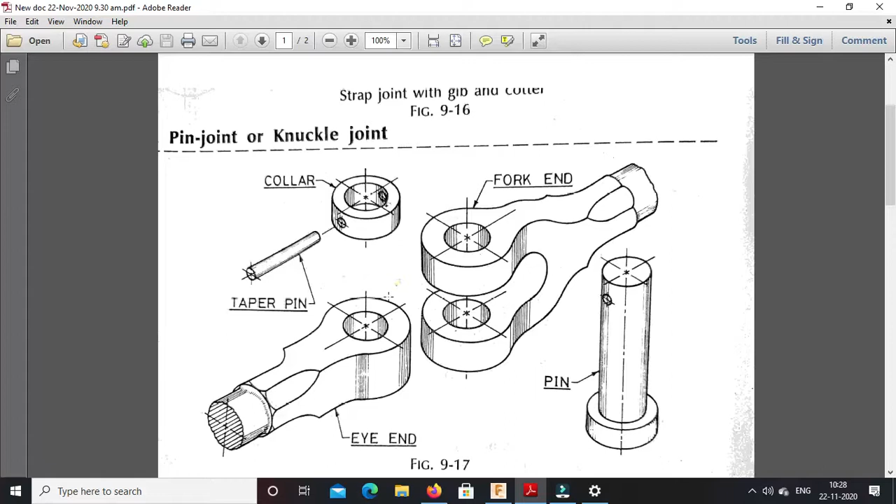In this video, we are going to assemble those parts to form the knuckle joint. This eye end will be connected to the fork end through the middle cavity, and the eye end will get fixed in between. Then through the common hole, the pin will be inserted from the bottom side. The collar will be placed on top of the pin, and the taper pin will be inserted through the common hole in the collar and pin for locking purpose. This is the knuckle joint.

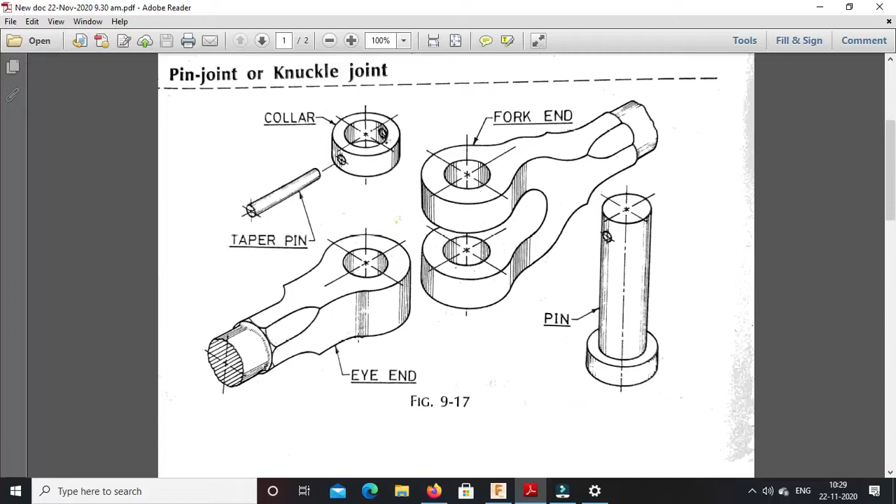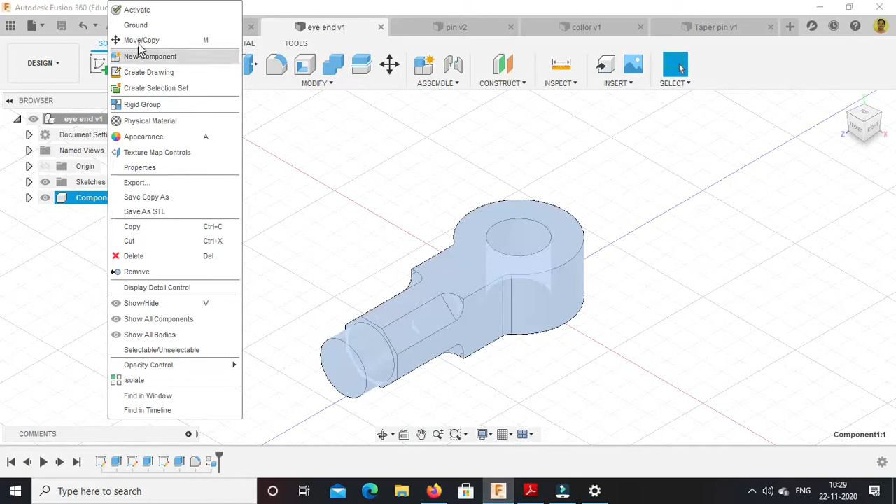We will start our assembly with the eye end. We have already created this part and saved it by converting into components. First step is to fix this initial component, so go to Component, Ground it. Now it will not be movable.

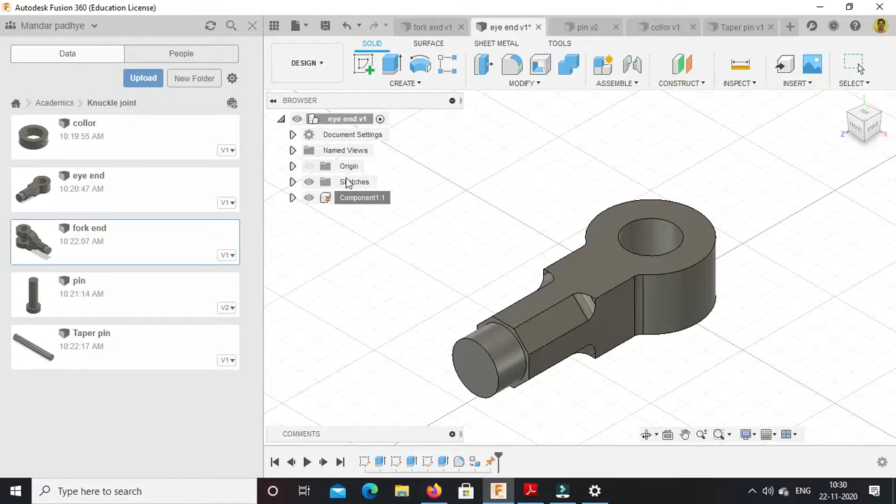Now we will insert another component, the fork end. Go to data panel, select this fork end, right click on it and insert into current design. It will take some time. We'll drag it outside for simplicity, press OK, close the data panel. Now I want to connect this fork end with the eye end, keeping this hole common.

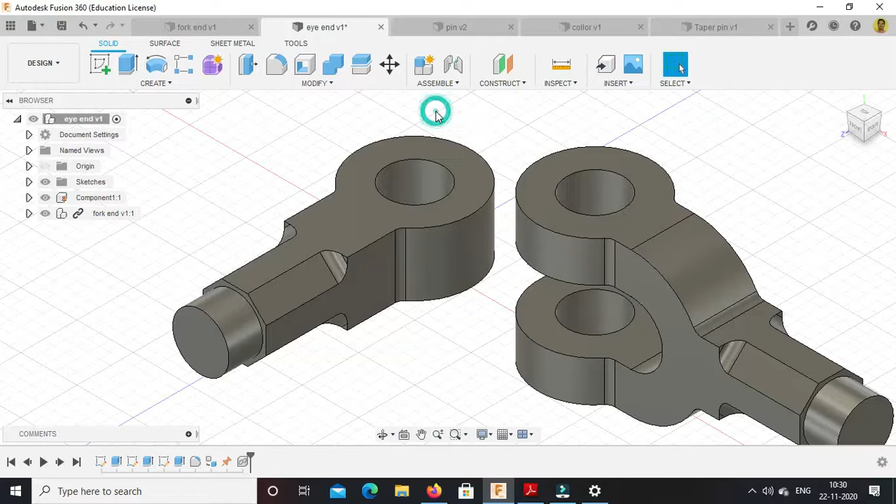For that purpose, I need to provide a joint between them. I will consider this as a reference part. Go to Assemble, Joint, press Ctrl for selecting the center. Then this upper face should be in contact with the lower face of the eye end.

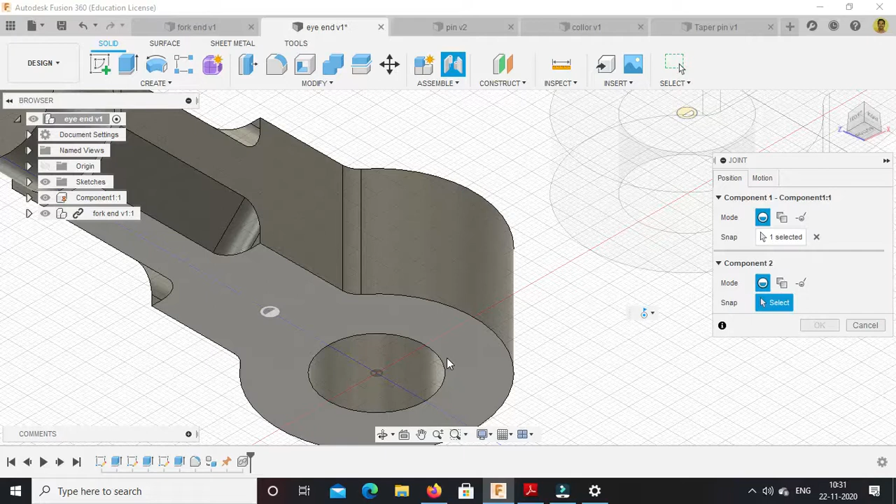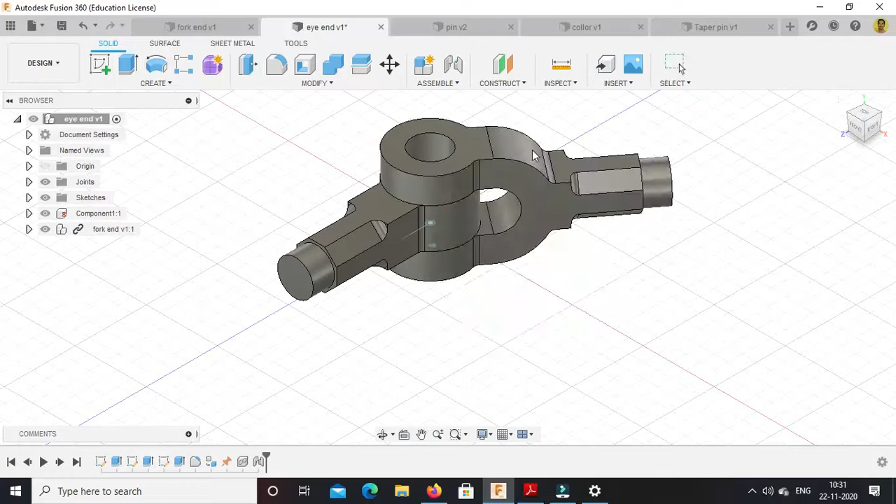Motion type should be revolute, along the z axis. We want it as the z axis, so we will keep it as is. Press OK. Now it is possible to rotate this component. We will keep it like this and capture this position for reference. It is still movable and will come back to its revert position.

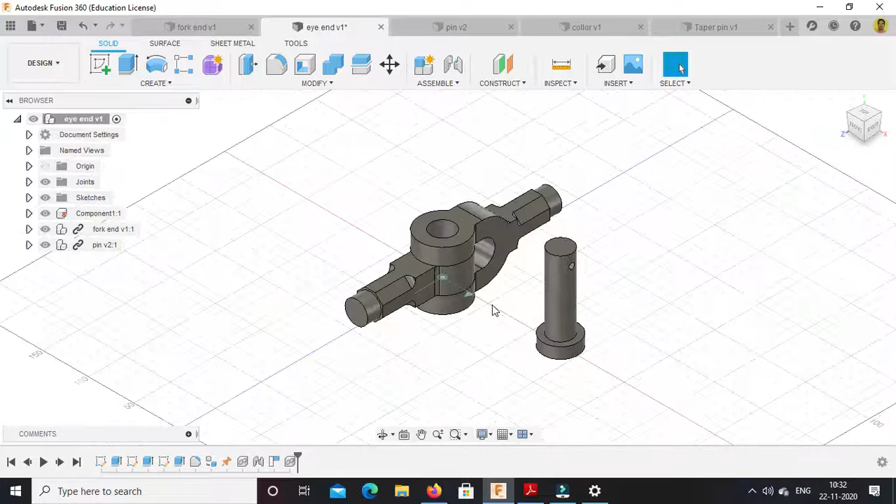Now we want to insert the pin inside this. Go to data panel, right click on the pin and insert into current design. We will drag it outside, press OK, close this data panel. In order to insert this pin, we will insert it from the bottom side. Go to joint command.

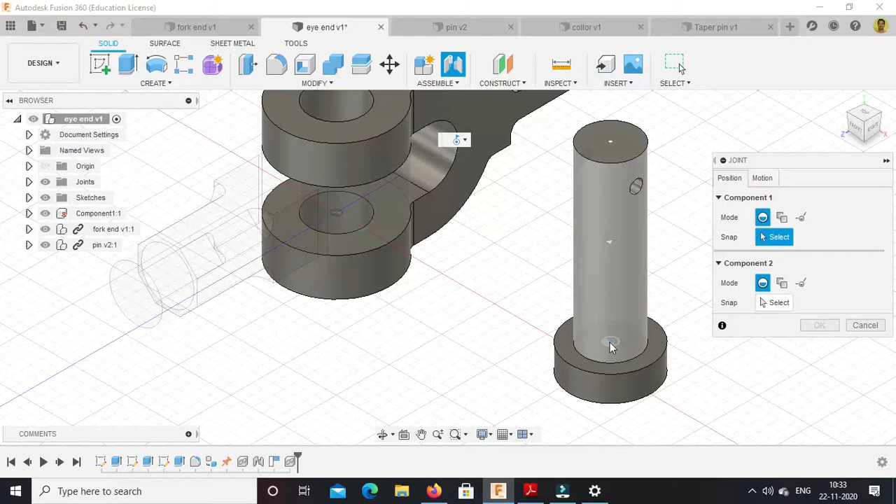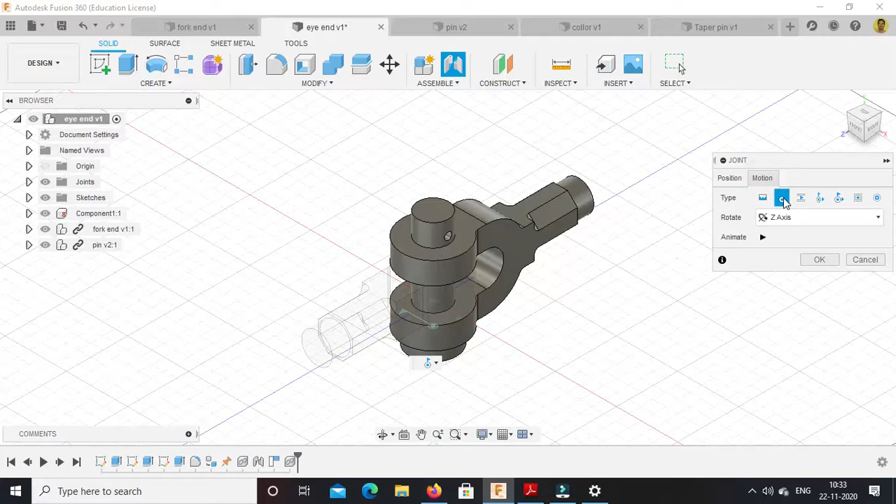It should again have relative motion. Select this face along with the center point fitted at the bottom. Then from the bottom side, select the bottom center along with the circular surface. That pin will get fitted inside. Press OK, because we want the motion to be revolute. Press OK, so now it can be rotated as per requirement.

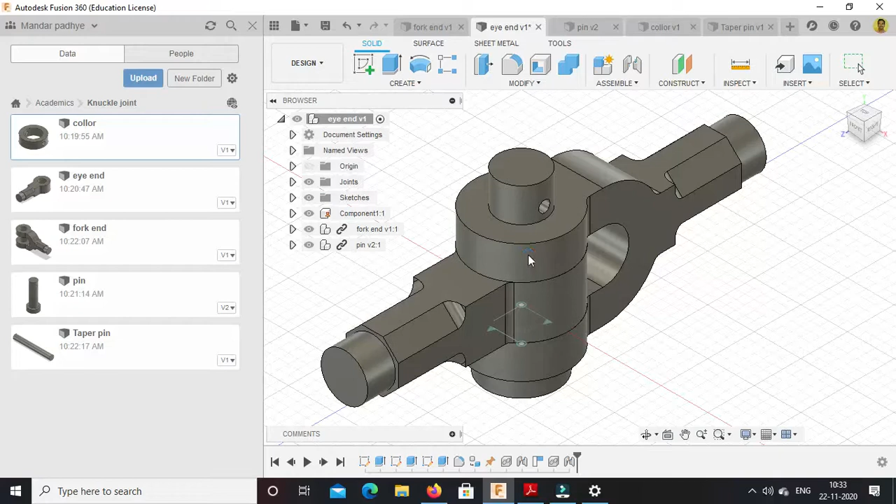We'll come back to original position using the revert option. Now we will place the next component, the collar. Go to data panel, select this collar, insert into current design. We will drag it outside, press OK, close this data panel. Now we want to insert this collar over the pin.

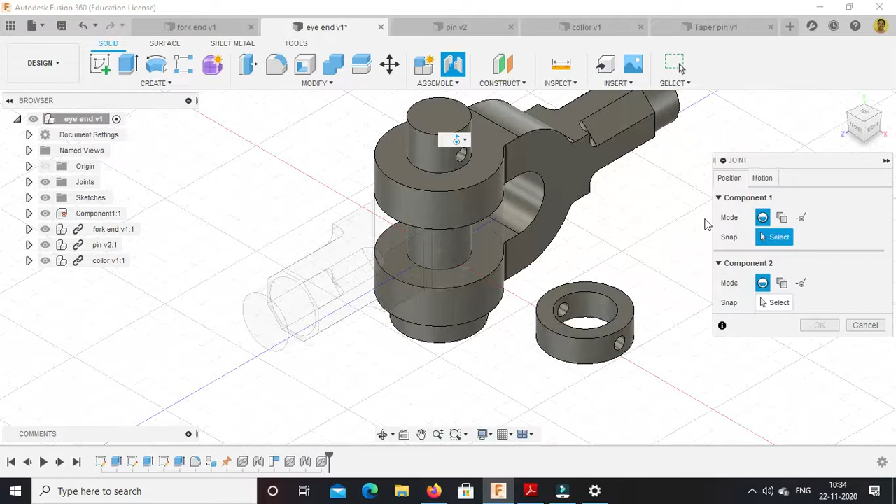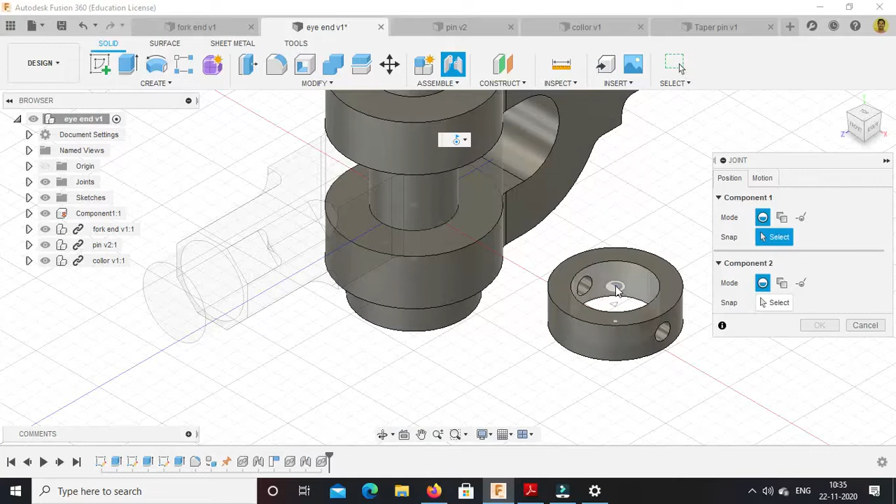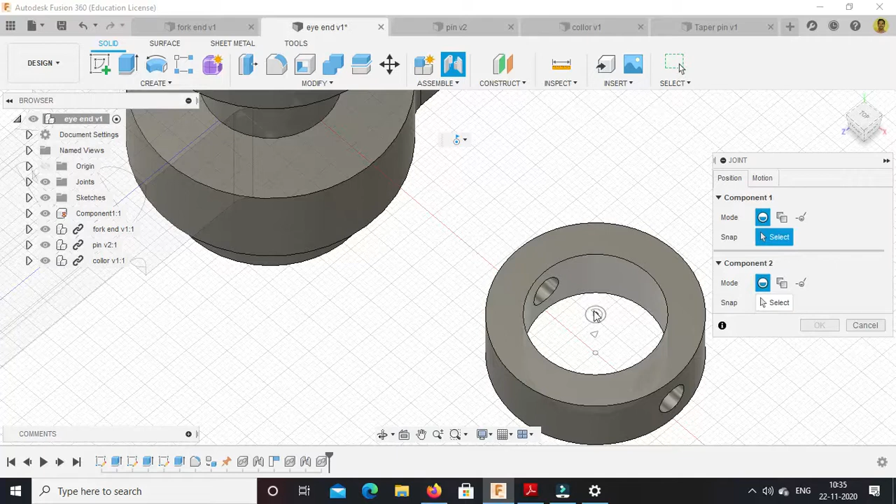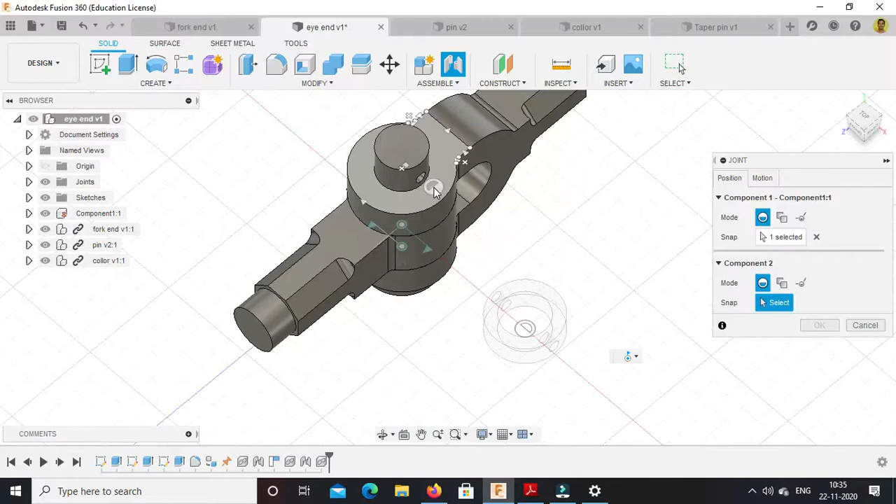For that purpose, go to Joint again. Select this inside surface, press Ctrl for selecting the center circle. Then we will select the same circle which is going to... no, we will not provide joint like this. We will try it in a different manner.

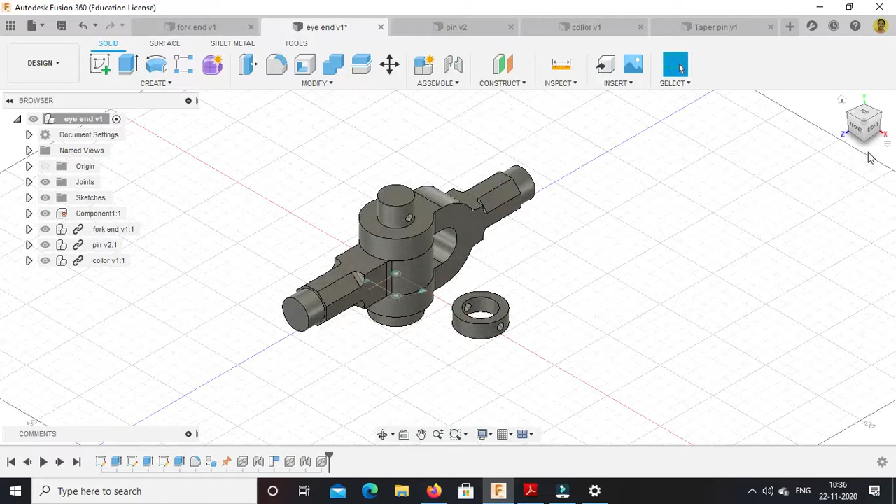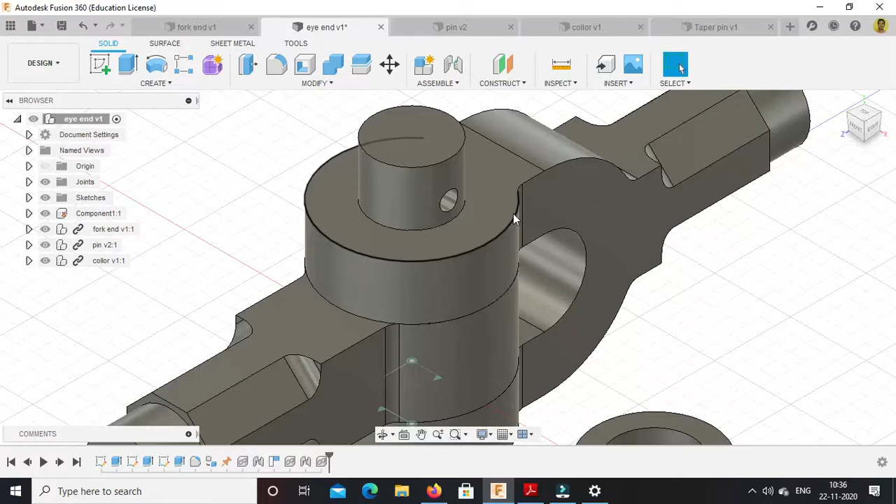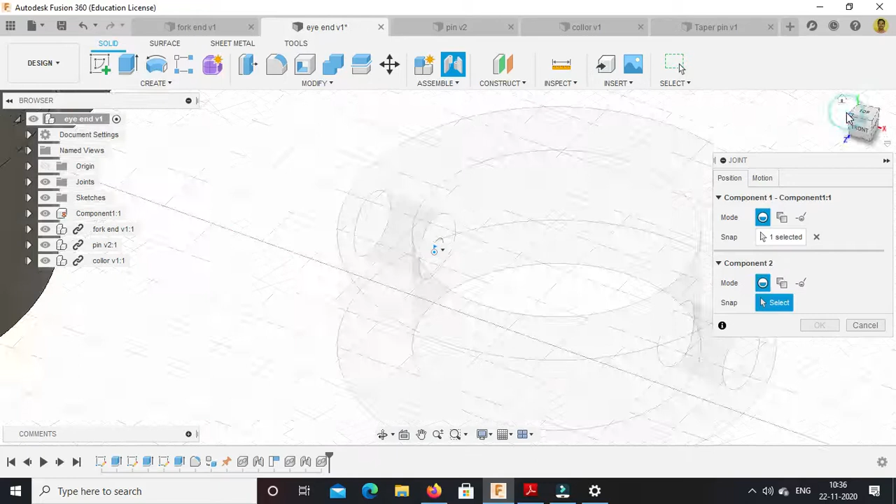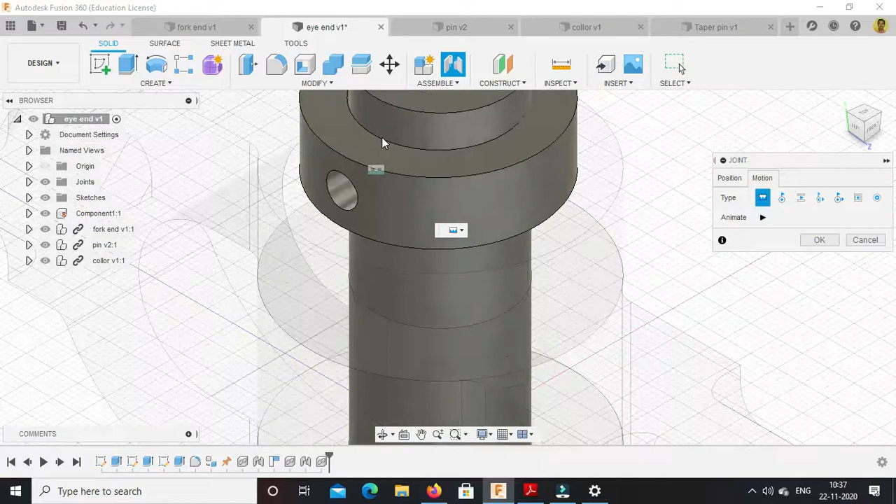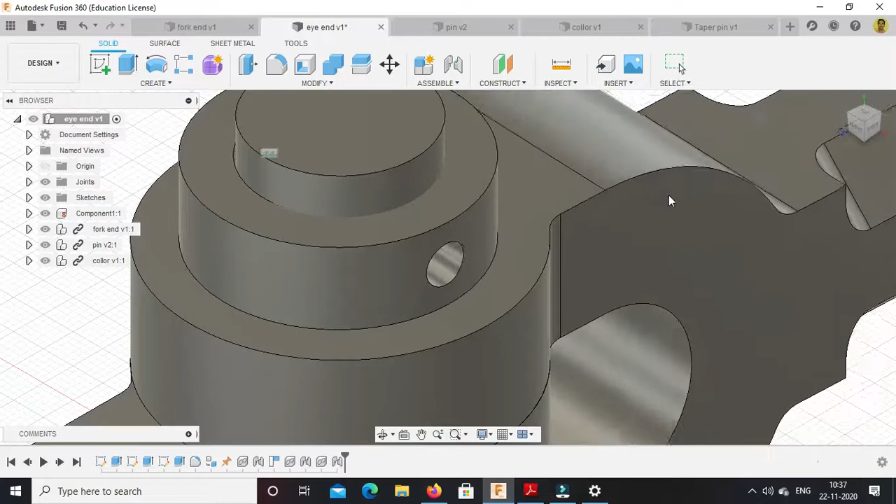Now we will be able to move it. Again go to default position. Now the final part remains - inserting the taper pin inside this hole. For that purpose, go to data panel, insert this taper pin into current design.

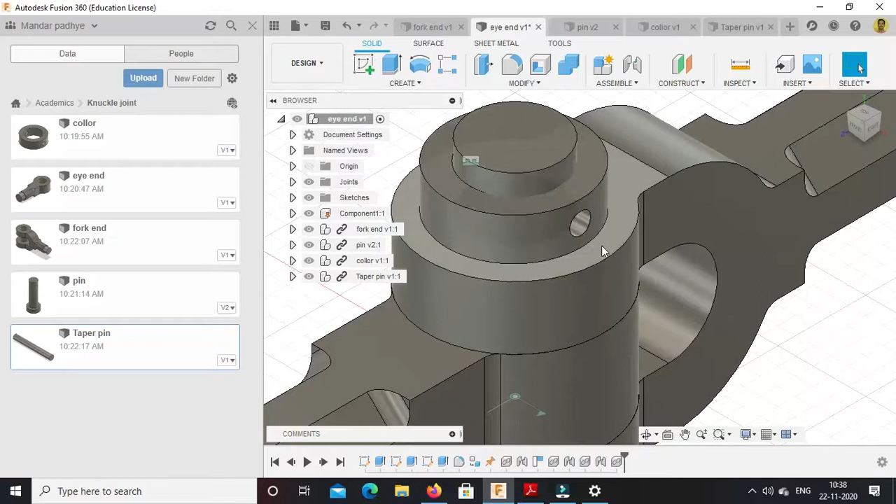While giving joint to the collar, either you can give the joint between the pin and collar, or provide a joint between this part and this part. There are various ways available. I have shown you joint by using this cavity hole, which I have to match.

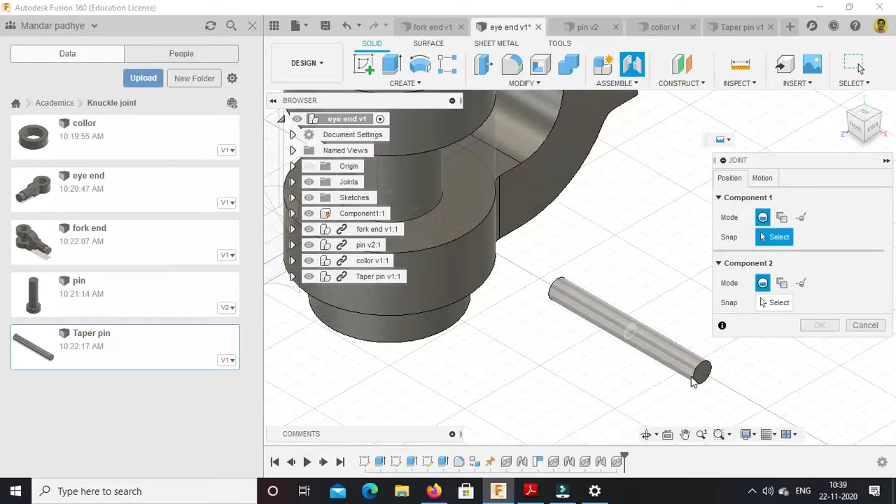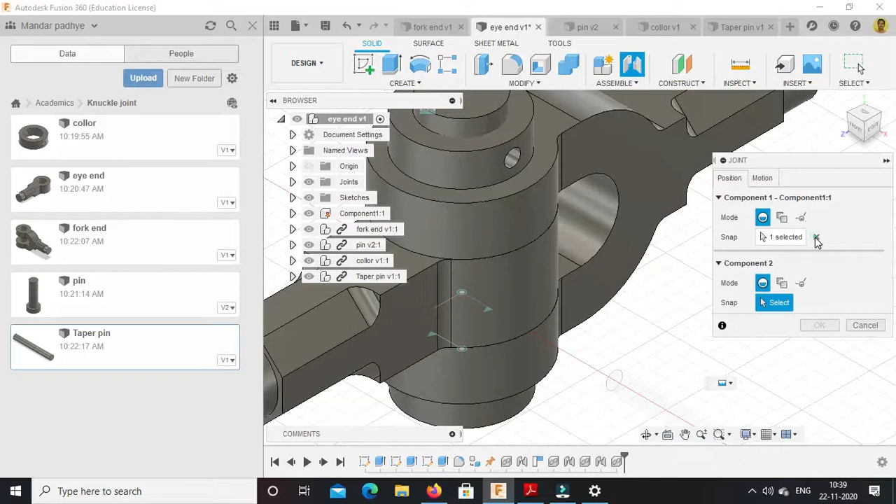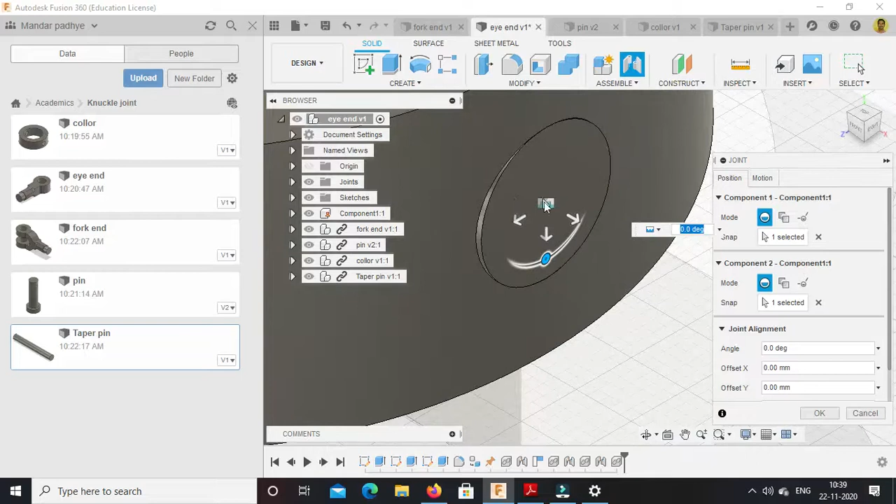Now I will connect this taper pin. For that purpose, go to joint again, select the face, then select the another face. I will select this again, then select the another face. While creating this joint, I selected the circular part along with the center, and the circular part of this hole along with the center, so they are exactly matched with each other.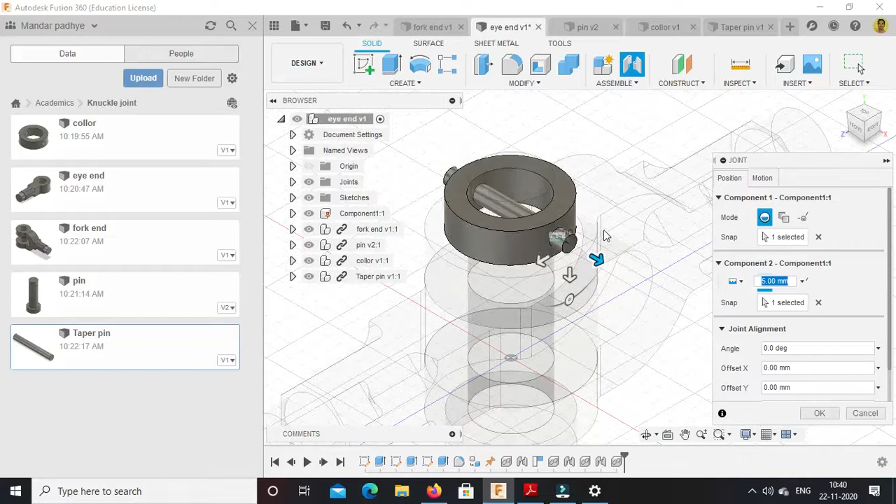I can provide an offset here by giving some distance. Let's suppose we have created 5 mm as extra, so we can keep the same distance of 5 mm - you can give the offset. I selected this surface with its center and this cavity of the hole with its center. Motion type - you can provide sliding also, so that pin can move outward, but for fixing purpose it should be tightly attached with the collar, so I am selecting the rigid option. Press OK.

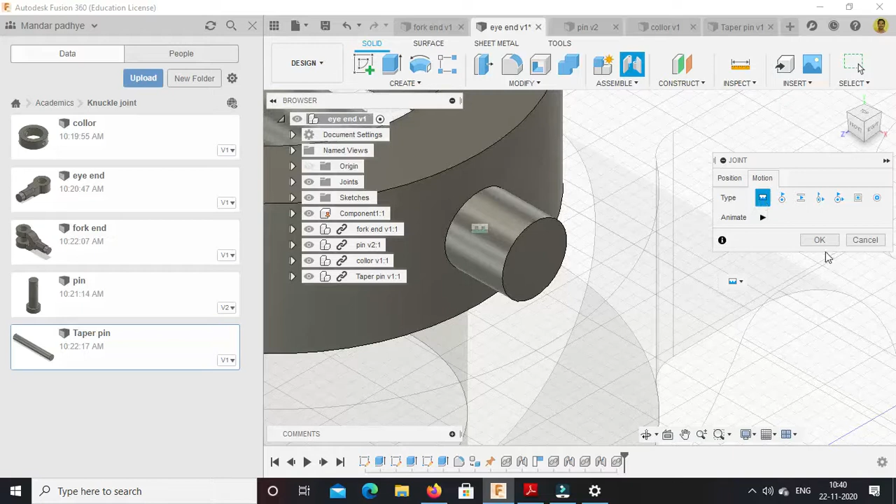Now if you observe here, if you try to give angular motion to this, it is possible. That is the advantage of the knuckle joint. This end is also movable, but right now in our assembly we have fixed this component initially, so it is not movable.

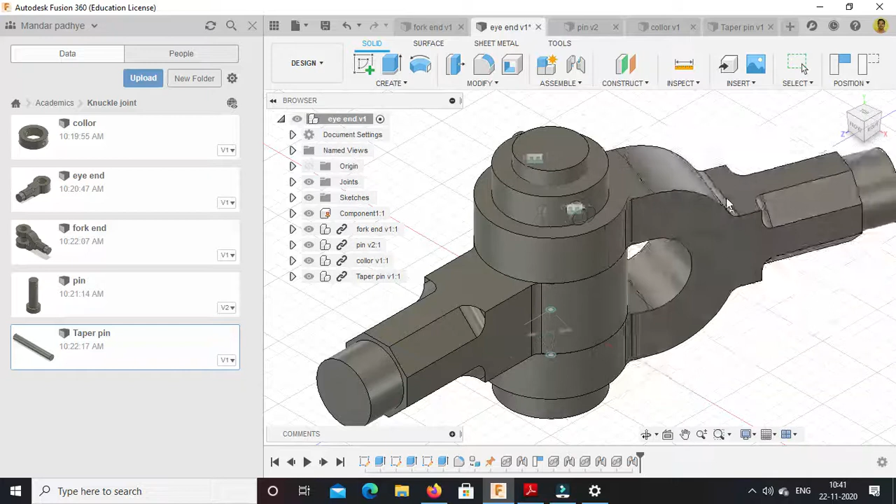But in real life, these two ends can have relative motion between them. So whenever there is a joint required to connect a tractor - the front portion of the vehicle with the back portion or a trolley-like structure - this type of knuckle joint can be used. This is the assembly for the knuckle joint.